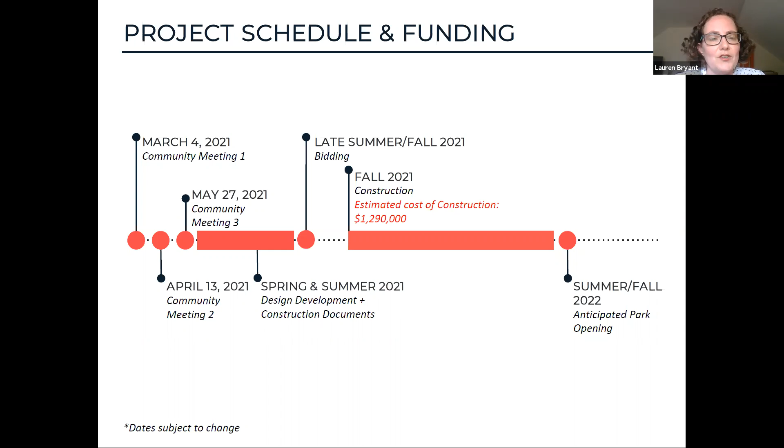And we're hoping that construction will start this fall, with reopening the park summer or fall of next year. And then the construction cost hasn't changed since the last time we spoke, and it is $1,290,000. And with that, I'm going to stop talking and turn it over to Kevin. Thanks, Lauren. Again, I'm Kevin Beuttell, landscape architect with Stantec.

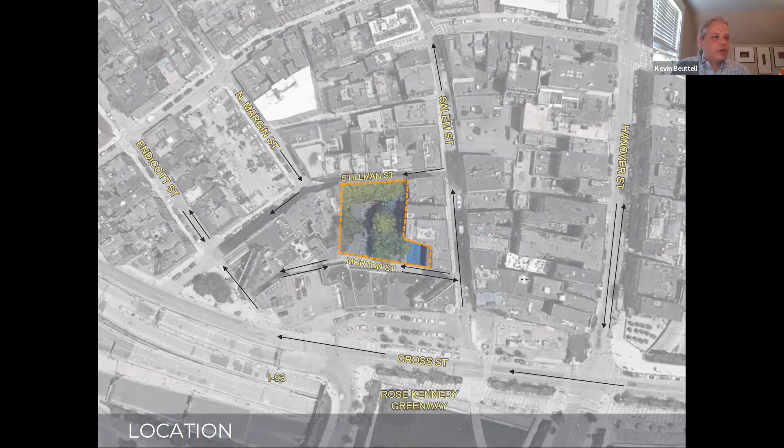For those who aren't aware, Cutillo Park is located at the southern end of the North End of Boston, between Stillman Street and Morton Street, close to Salem Street. I don't work too far away and have gotten lunch on Salem Street many times, but had no idea this park was here. It's hidden away on those classic small, narrow North End streets, a nice neighborhood gem of a park.

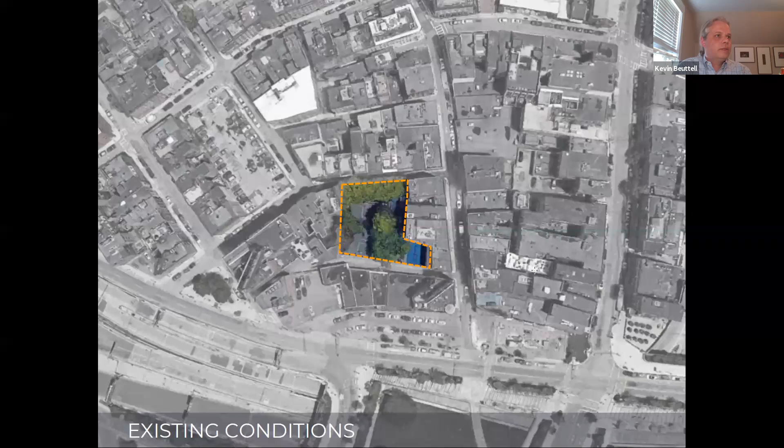Again, what the park looks like today, with the trees leafed out. It's a very shady park between the trees and the surrounding buildings. It's a little over a quarter acre in size, so pretty small. For program space, the basketball court takes up a lot of the park currently, but there's also some play equipment and swings. That program space is about two-thirds of the overall park area, and the remaining passive space, about a third, has seating and some foursquare painted on the pavement surface.

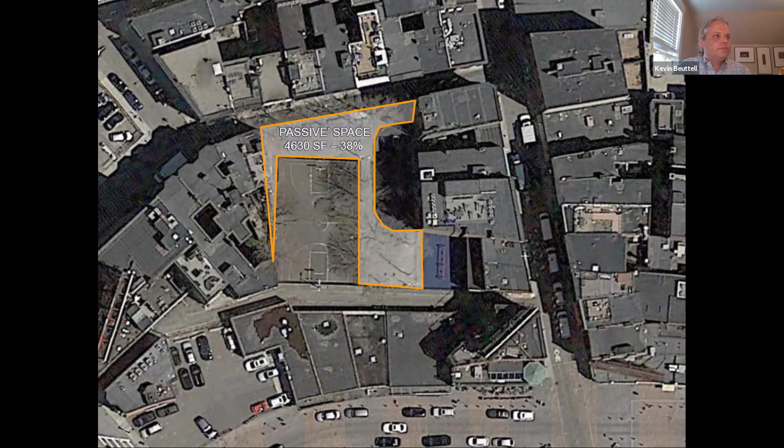When we started our analysis and design work, we wanted to understand what was located around Cutillo. So we looked at the whole North End area to see where there are playgrounds, what age ranges those playgrounds address, what kind of court facilities are in the area, and what kind of dog parks are around us in the North End.

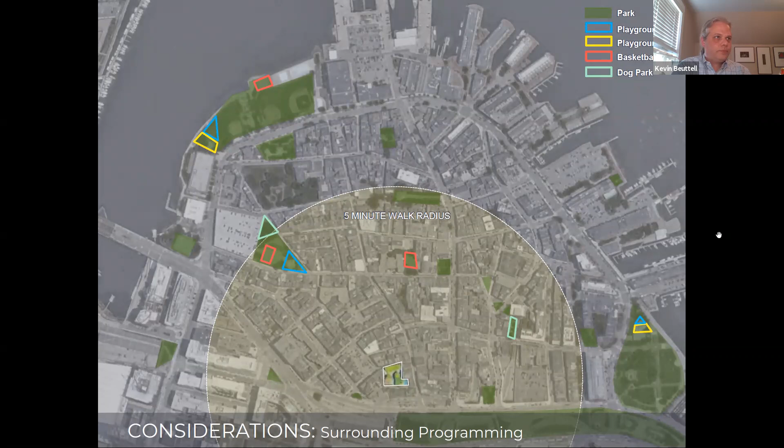Some of the feedback we heard over the first couple of meetings and in the survey we issued included interest in nature play, adult exercise, preserving the existing trees, providing flexible lawn space, and incorporating play particularly for older kids, generally in the 5 to 12-year-old range. We were also asked to maintain or preserve seating, particularly for older residents, with comfortable seating that has backs and armrests, preserve the trees, and keep things open and visible.

We're aware that there's some undesirable activity that can happen in the park, so we want to make sure it's as open and inviting as possible. On that front, we've been talking with the Boston Police Department. We're planning on putting in multiple security cameras connected to the Boston Police system as part of this project. From our early conversations with them, they've said that putting those cameras in has been very effective—they're aware when undesirable activities are happening, can go out to the site, and people quickly figure out that it's no longer a place to hang out.

Another thing we were asked to preserve is any significant historic pieces found during construction—that's definitely something we'll want to preserve or maintain.

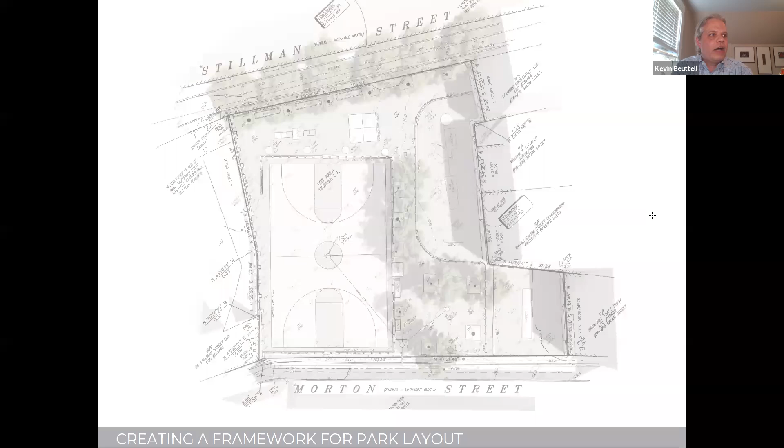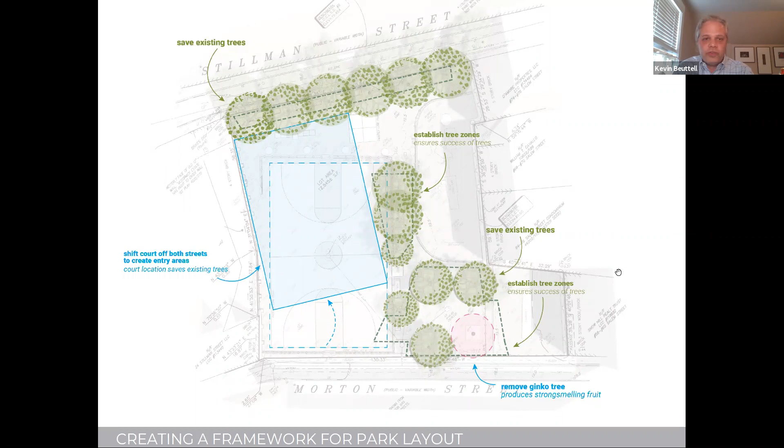So when we started the design, we were trying to create a framework for the park layout. This is very generally the approach we were trying to take, where we wanted to shift the court off of both streets, so we have a buffer and entry areas both along Stillman and Morton. We wanted to preserve all of the trees in the park, with one exception: there is one female ginkgo tree that drops fruit, which when it rots can have a pretty unpleasant smell. That is a tree we're looking to remove and likely replace with a new tree.

Along those same lines, we do not have a dog area in either of the concepts anymore, but we are aware that a lot of dog owners come through the park, so we are making provisions for them. We're going to be adding a drinking fountain, we'll make sure it has a doggy dish, and we'll have a bag dispenser located in the park. So just because we don't have a designated area for dogs does not mean that we're not trying to design with dogs or their owners in mind.

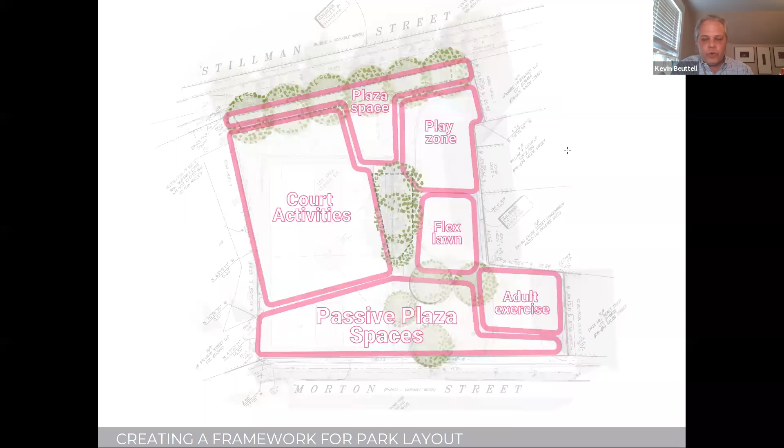So this is the first concept, obviously the one where we've got that full court, and I'll walk you through the different programmatic elements of this concept. Then we'll start showing you side-by-side comparisons, the full court concept with the half court, and explain to you what the similarities and differences are between those two.

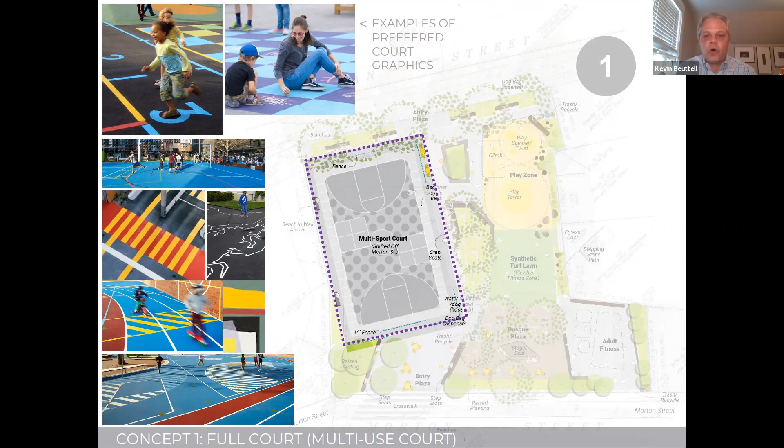For the court, we want to make sure it's good for basketball, but also as usable as possible for other purposes. We can do fun things with the court painting and patterning to make it more playful for kids - a trike loop, a perimeter path for learning to ride a bike, sketching, hopscotch, foursquare, or fun patterns to engage kids and invite them into the court when it's not being used for basketball.

For the play zones, this area is where we intended the most intensive play area. It's a small park, so we're using a corner of it for play. One strategy was looking at play towers - play equipment where the play goes up rather than out, to make the best use of the limited square footage available.

But under any scenario, we're looking at incorporating natural materials like wood and stone in the play areas, though not necessarily natural play - we're not looking at loose materials, since that doesn't work from a maintenance standpoint. Some of these photos show sand or bark mulch, but our intention is to go with a different kind of safety surfacing - either rubber safety surfacing or potentially synthetic turf.

We can talk about that more later. But another thing we'd like is for whatever equipment we use to have movement in it. With this limited footprint, we didn't feel there was enough room for a swing, but there is enough room for a small spinner piece of equipment that kids can get on while others turn it around, as well as some climbing equipment like the play tower I described.

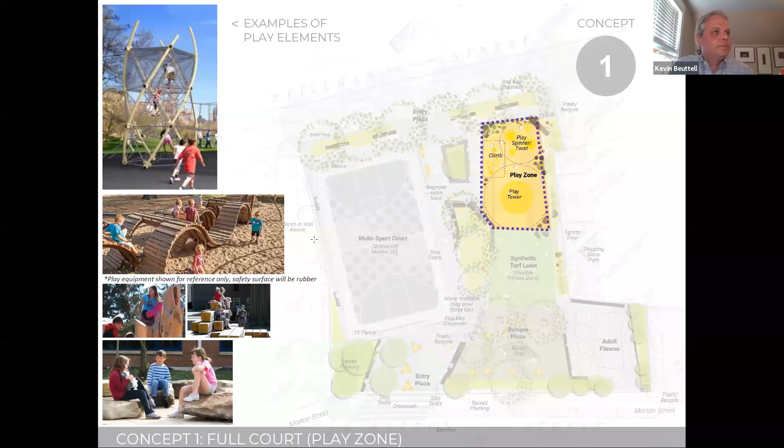Synthetic turf lawn area - this could be used for multiple purposes, as a flat, flexible space for picnicking, working out, or small exercise classes. We could also make it a little fun or playful, particularly at the edge where it meets the play zone, by playing with the topography a bit to make it more fun for kids of all ages.

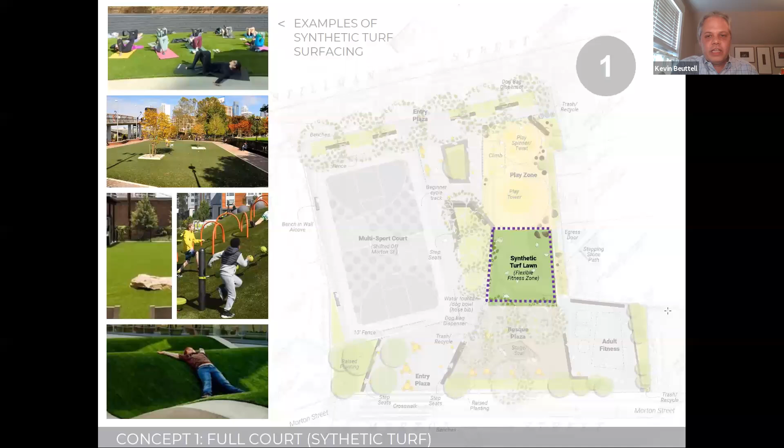Another specific question: given that we'll have some sort of firm safety surface within the play area, is there a preference for the more common rubber safety surface used in a lot of Boston city parks, or is there interest in a synthetic turf surface? Those turf surfaces can get hot in the sun, but because this is such a shady park, we really feel it could be a good fit. It's admittedly not natural, but it has that more natural look, and with all the shade, that would mitigate temperature issues.

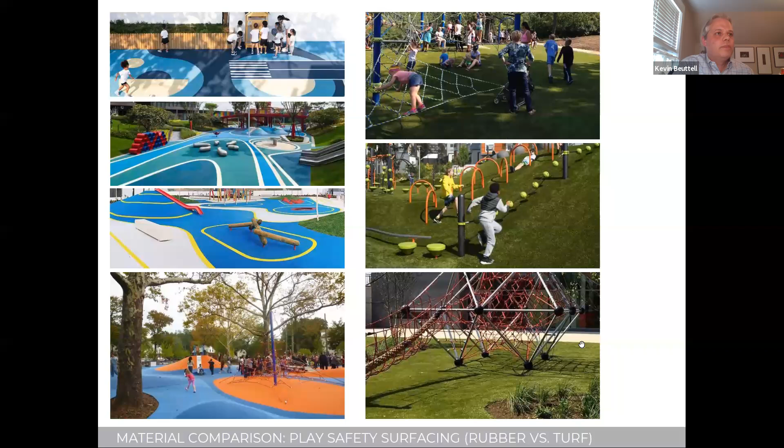We also thought that rather than cutting up the park into different types of materials, since the play area is adjacent to the synthetic turf lawn area, having that same material carry through both areas could be nice. These photos show what that could look like, on the right-hand side here.

For plaza areas, we pulled things back from Stillman to create a more substantial, flexible seating zone along that edge, as well as plaza seating space along Morton. They're fairly comparable in size - a little different configuration, but about the same area and seating capacity.

Along Stillman, as exists today, we're proposing new backed benches with armrests between the trees, facing into the park. We've also got a nice entry area here where we can receive people and provide seating, with an opportunity to add more vegetation and planting into the park. Along Morton, we've got an entry plaza, again pulling the court off of both streets to help receive people into the park.

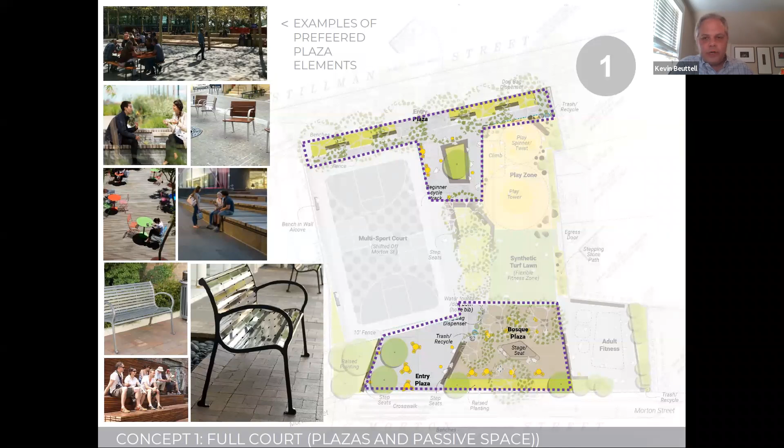But with all of the trees that are here, we thought we could potentially do some sort of elevated decking system, so we could get rid of a lot of the pavement and give the tree roots more room to grow, but at the same time have a firm surface for people to occupy. That seemed like a good way to balance both the needs of the neighborhood and the needs of the trees.

An adult fitness area is located here in the corner. There are a couple of different directions we could go with it. I think we've got enough space where we could get in a reasonably large, single piece of exercise equipment that has multiple functions. We've put these in a couple of parks recently, and one of the reasons we like it is because to a kid it looks like play equipment, and to an adult it looks like exercise equipment. So it's flexible that way, which is nice given the limited space we have here. Anything we can do to make spaces multifunctional, multi-purpose would be good.

But we can take a similar approach with smaller pieces of individual equipment. We don't really have room for both, so I think the choice is: do you go with one piece of equipment, or multiple smaller pieces of equipment? If people have a preference, we'd be interested in hearing your thoughts tonight.

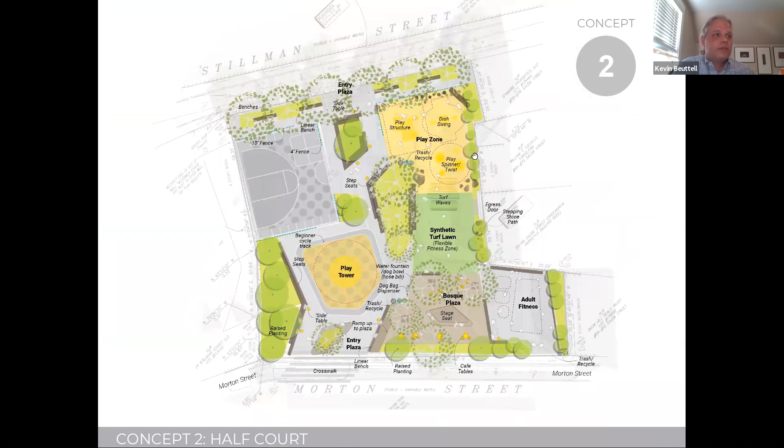So this is the second concept. At a glance it's fairly similar to what we had before, but we've got the court here as a half court, and we've also rotated it, so it's got a little bit of a different orientation. I'll walk through the different elements again, making a direct comparison with the concept I was just showing you, with the full court, and this second alternative with the half court.

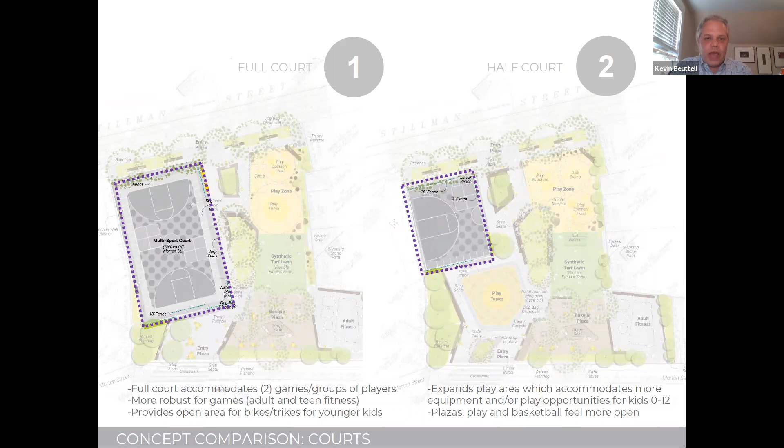So the court areas, like I was just saying, we've got the full court here, the half court there. One of the advantages of changing the orientation of the half court is that it will really reduce the amount and height of fencing we need to put in the park, which will be a really nice improvement from a visibility standpoint. That chain link, although you can see through it, does create a little bit of a visual barrier, and I think it just makes the park more inviting and pleasing to be in when you don't have a lot of tall chain link fence in it.

We've got a diagram right here that shows that. We want to make sure we're keeping the balls within the park, within the court here. The red lines indicate 10-foot high fencing for ball control. We can break that a little bit where we have room, so instead of making it a wall of fencing, we can offset it so there's a little bit more of an easy way to get in and out of the court—again, to make it more inviting, whether you're playing basketball or using it for other activities. This darker purple color would be 4-foot fencing, which also helps with ball control to corral the bulk of the balls used here, but at a lower height.

And then around the play area here, you can see we've got fencing along Stillman. The idea is to make sure the youngest kids don't have an easy way to escape onto the street, to keep them focused more internally in the park. For the half court option, we really don't need any 10-foot high fencing, since the wall of the building has very few windows, so we won't need fencing there for ball control. We can have these lower fences along the side of the court, and a similar kind of configuration of fencing for this play area.

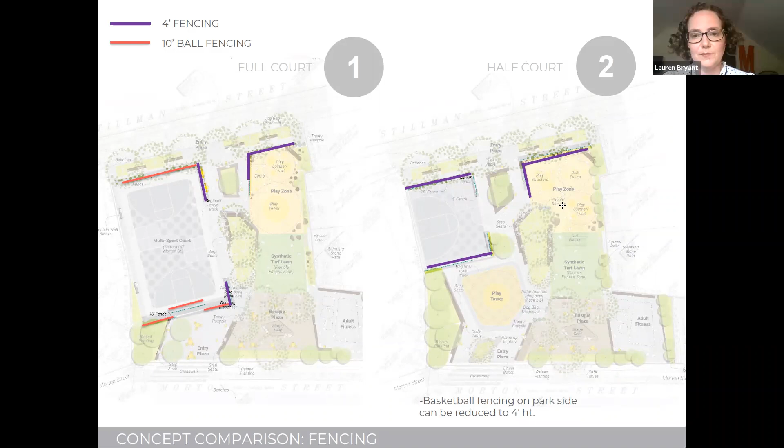For the play areas, there's a trade-off between court space and play area. With the half court option, we can expand the play opportunities. We've got space here for a larger play tower, and that frees up more space in this corner where we think we could fit in a swing, plus other equipment we've discussed, like a small spinner and a small play structure geared more for younger kids.

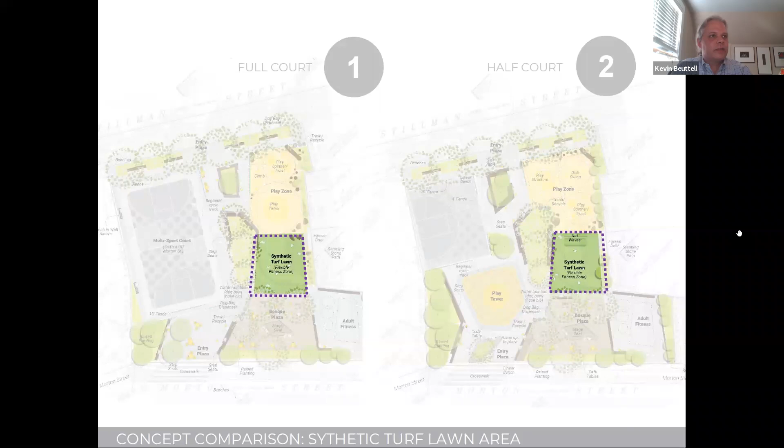The adult fitness area has the same footprint in both schemes, in the lower right corner of the park. You can see the plaza spaces in both schemes—the configurations are a little different, but not a whole lot. In broad strokes, they're very similar in terms of what you get with the full court or half court option, and the square footage along both Stillman and Morton streets is pretty comparable.

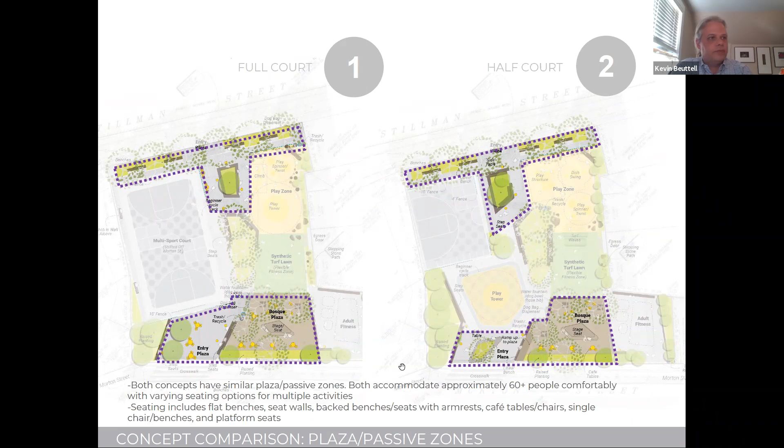For seating, we're looking at a variety of types: backed benches with armrests, tables with movable chairs—movable within a limited range, not chairs people could walk away with—and bench seating or platform seating. Again, these natural materials could be used as informal seating as well.

So again, these are the full and half court options for you guys to consider. I'll leave it here for Lauren—I think there was something you wanted to talk about on this last slide, right?

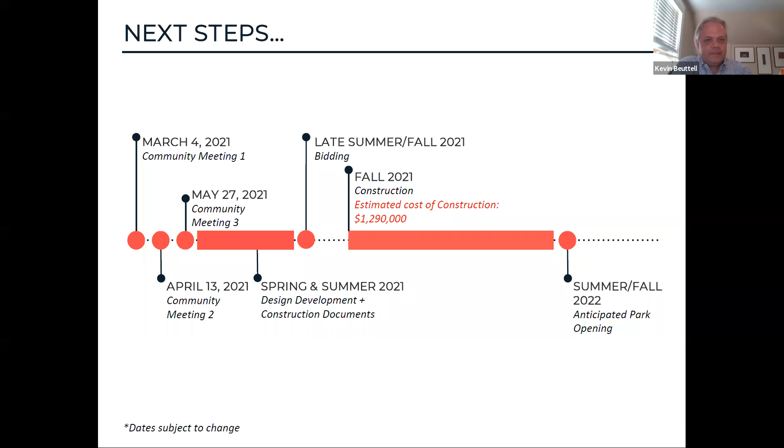This will be at the very end after discussion. Oh, sorry, that's my mistake.

So with that, we'll open it up to everyone's questions and comments.

Would anyone like to jump in with comments? We could start looking at the chat.

I think the chat is a good place to start, with the synthetic lawn, just in terms of what the intent is for using that space. Because if it's going to be intended for young children, it should probably just be officially part of that space, since if there's something dedicated for children, I'm probably not going to go in there and sit or bring my dog. But if it's intended for adults to lounge, sit, or do yoga class or whatever, that might be a bit of a pipe dream, but maybe.

Yeah, because I think dog use will absolutely be an issue, and people might not want to let their child roll around on the turf if it's just open.

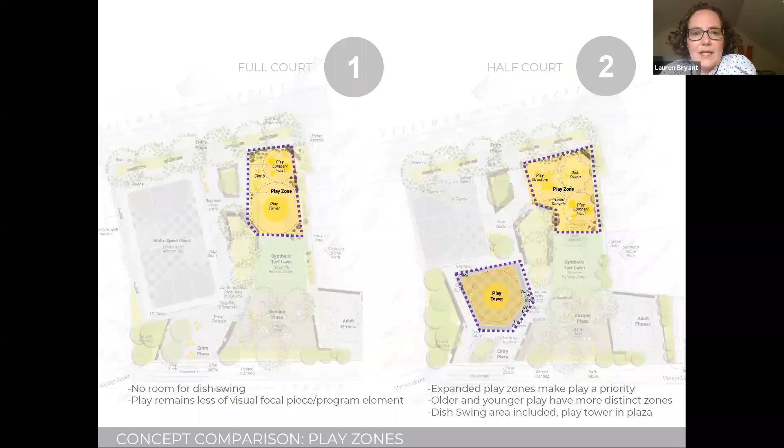Could we, Kevin, while we're talking about the exercise equipment, go back to the slide that shows those different types? Because while we're talking about it, I'd be curious what people's take is on a larger structure that has a lot of different components on it versus a couple of smaller ones. I'm just curious if people on the call have opinions on that.

I don't use them, and I don't either. But I think it's better to have individual equipment as opposed to one piece. I understand there can be multiple uses of one piece, but just the look of it alone, the individual pieces seem more attractive as well. Maybe less intimidating.

I do agree. I think I like the space for it because it is very secluded back there. Ideally Morton Street would be spruced up a bit more so it's more inviting, but it is a very private area. That's why there's a lot of drug use back there. The hope is that we have folks in there early morning and in the evening.

In terms of the equipment, I guess it depends on the number of uses. I've seen them come with little instructions on what to do with each piece. So I think just having something universal and appealing that will draw people in, and hopefully word will spread that there's a great workout area there.

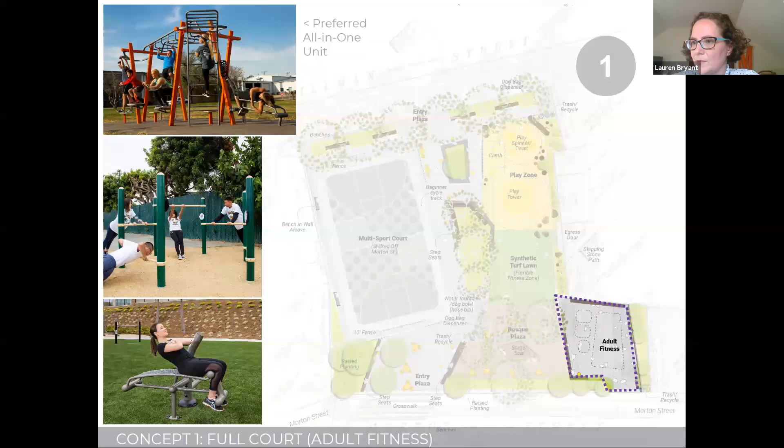I'm concerned that with the half court option, more play space has been added, not passive space. Would it be possible to add more passive space? Also, what is the driving force of having the half court on the Stillman Street side?

With that one, this is what I was asking Kevin about earlier—if you see where the court is in the full court option, I was wondering if the half court moved to that same level, and then it would be pulled off of both streets, because the fencing required even on the half court on those two edges, we're trying to pull that fencing.

That was another question in the chat about the existing fencing along the street edges. We want to open that back up like it used to be more historically, and we don't want tall fencing along the street edges. So our thought was pulling it back off of either street allows that edge to not have high court fencing. If it were a full court, like Kevin showed, the fencing would need to be higher than if it were the half court. But either way, I think we can look at how to address that concern raised tonight.

Let's see—yes to not neon colors on the court. Agree about natural surfacing colors. Noisier spaces should definitely be moved to the Morton Street side, away from the residents on Stillman.

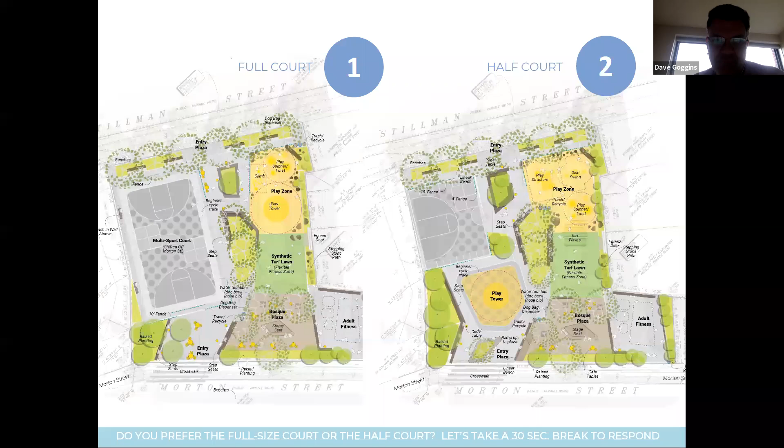The reason you don't see full court basketball games is because one of the hoops is not regulation, about 2 feet below where it would have to be. So no serious basketball player would go to Cutillo for a full court game. That's good to know, Dave. Thank you, that hadn't been brought up to us, or to me, before.

Anybody else have any thoughts on half versus full court? Yeah, hi, I agree with Dave. As someone who's played basketball in the North End, I agree this is one of the older and less well-maintained courts, especially given the new court over on the waterfront. It's not going to be a great place regardless of how big it is right now. So I prefer the full court option, designing it with paint that supports or encourages other uses, to maybe encourage other use on the second half if the first court isn't in big use. But yeah, that's what I think.

Thank you, that's great. And what are the other uses?

That's a good question. One of the things we had looked at, there's a lighter border around the outside that could be something like a toddler tricycle track, or kids learning to skateboard. My daughter does that, she's almost 9, she does that in basketball courts a lot, taking her skateboard around the outside. So it could be a little track for kids to run or use their bikes.

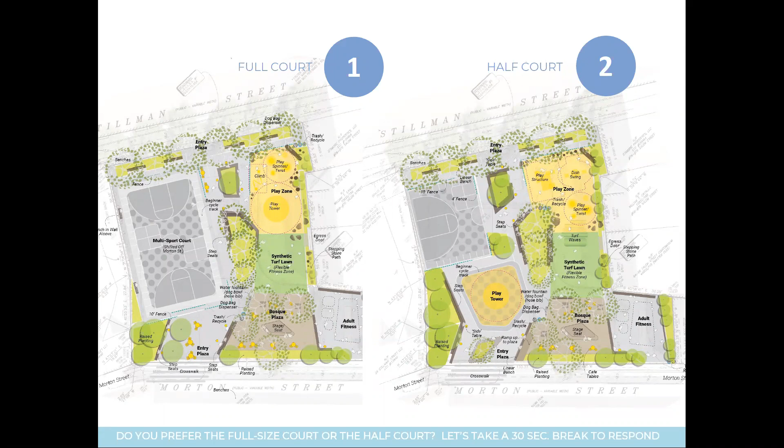So Kevin, is there anything we didn't touch on? We talked about the fencing, and the reason we were showing those options is that when I spoke with the Friends group last week, there was a question about whether there's an alternative to chain link, which is why we showed some of these other options.

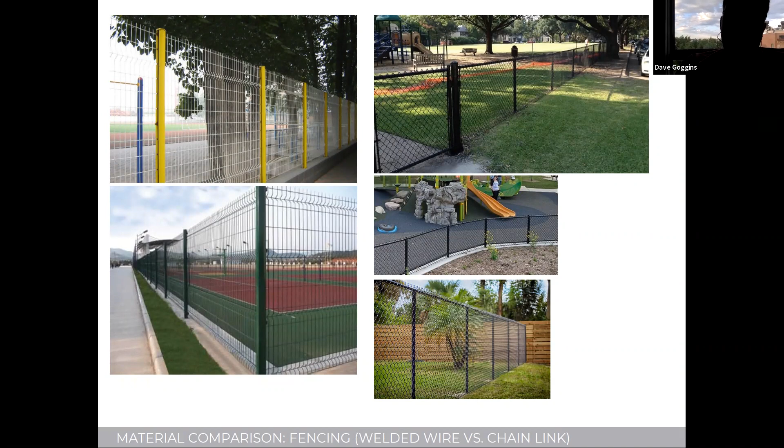But take a look and see what's in the dog park. Okay, yeah, that's a good suggestion. Thank you. You're welcome.

So does anybody else have any other thoughts for us tonight?